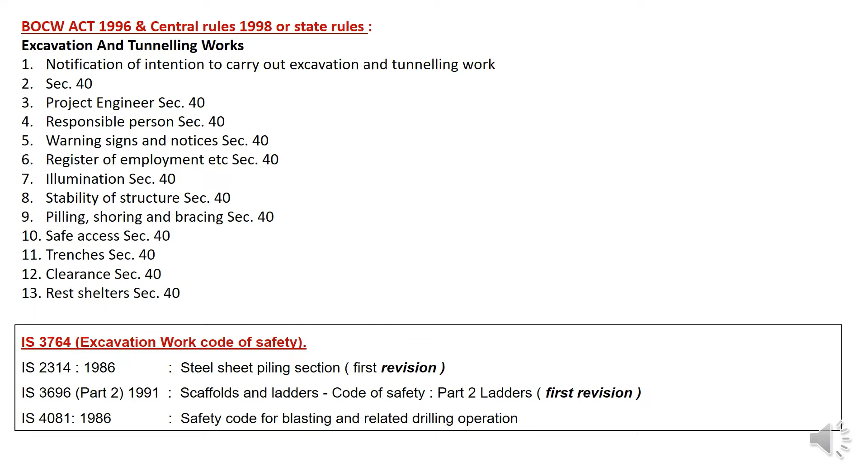And if we go to the IS code, then IS 3764, which is the excavation work code of safety, is applicable for excavation. In that, IS 2314 is there for steel sheet piling sections, IS 3696 is for scaffolding and ladders, and IS 4081 is the safety code for blasting and related drilling.

Before we start the excavation, we should take some initial approvals. If we are starting the excavation activity in a particular state, I'm talking about Haryana, then we need to take approval from the government authorities or the mining authorities, and the legal rule for that is the Haryana Minor Mineral Concession, Stocking, Transportation of Minerals and Prevention of Illegal Mining Rules 2012.

So what it says is where it is applicable. Overall, excavation of brick earth or ordinary clay up to a depth of 1.5 meters from the adjoining ground level. That is the basic idea. If we are going to excavate more than 1.5 meters, then we have to take permission from the mining authorities, and it has crisp details and a detailed description of the excavation requirements where we need to take the mining authorities' approval.

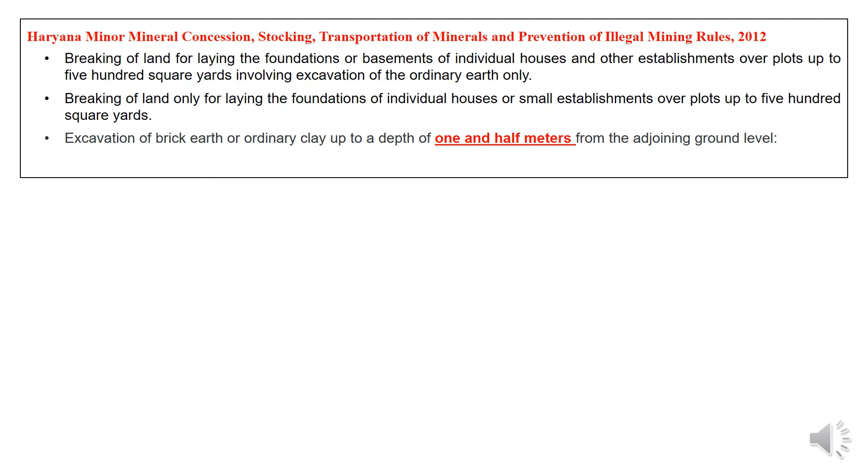That is, breaking of land for laying the foundation or basement of individual houses and other establishments or plots up to 500 square yards involving excavation of ordinary earth only, breaking of land only for laying the foundation of individual houses or small establishments or plots up to 500 square yards. And the last one is the 1.5 meters. So for that we need to take the mining approval.

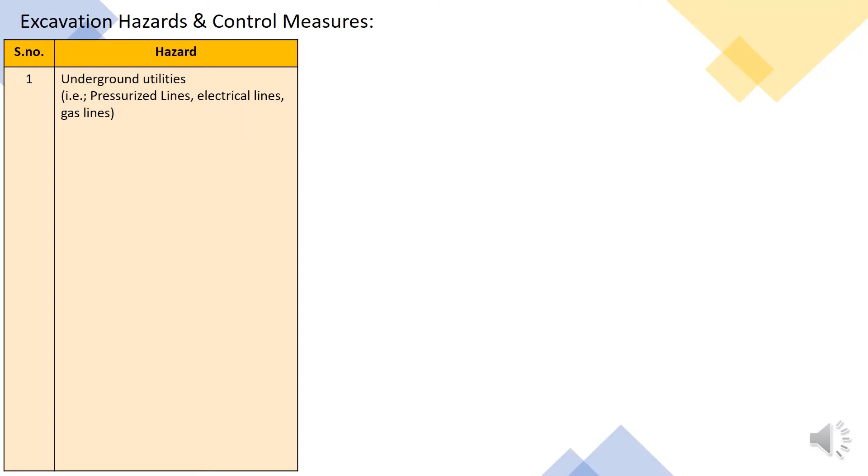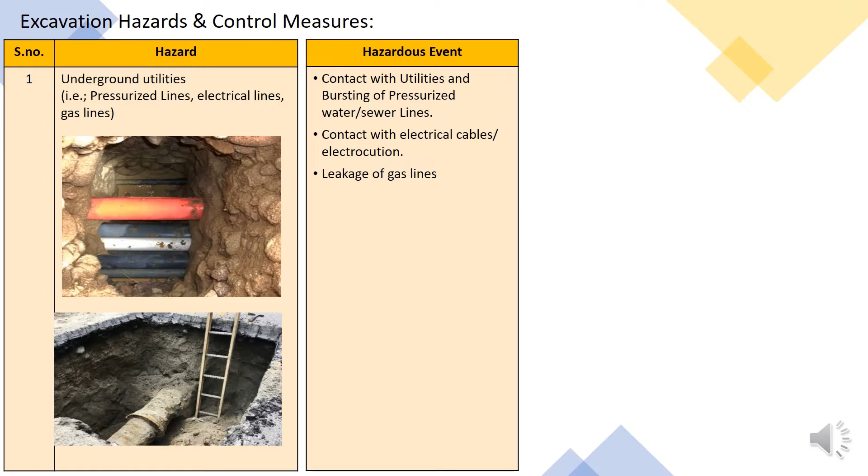If I talk about the hazardous event, if someone comes into that hazard or gets exposed to that hazard, then the hazardous event will occur. And the hazardous event may be contact with utilities and bursting of the pressurized water or sewer lines, and contact with electricity cables and electrocution. And the third one may be leakage of gas lines.

And the control measures to mitigate these hazards are: the first one is the excavation clearance work permit system to be followed. Second is use of the cable detector or utilities detector. Third one is trial pits shall be made before the excavation. Persons provided with mandatory PPEs. Refer the IS code 3764, which applies for excavation more than 1.5 meter depth only.

And the other one is IS 4081, which is the safety code for blasting and related drilling works, which we need to refer if we are going for that. Drilling and blasting operations should follow the safety precautions as laid down in IS 4081. So that depends if we are going to do blasting, drilling or related works in the excavation.

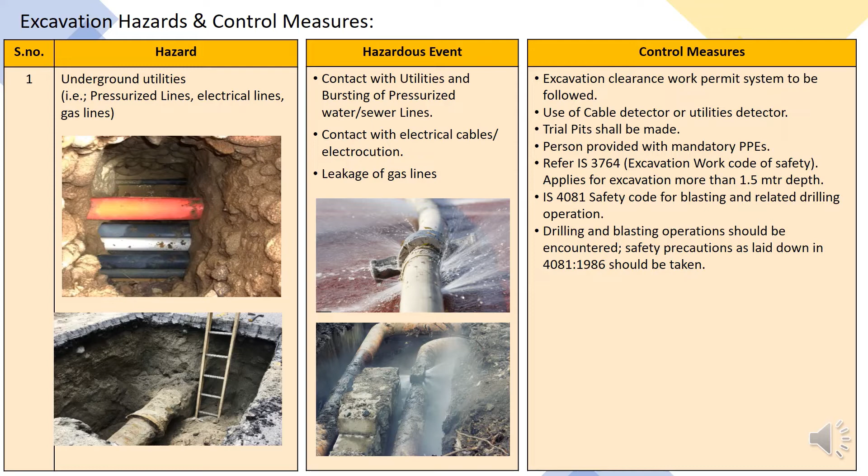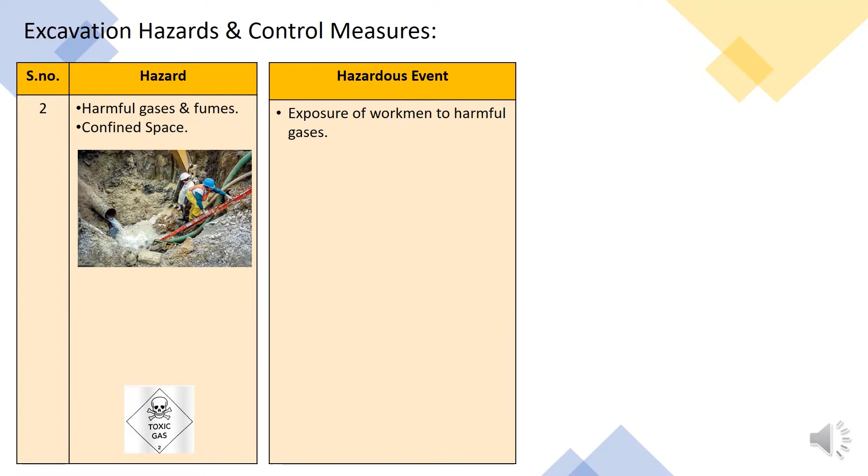Next, let's see the hazards and the control measures we have put here. The next excavation hazard is harmful gases and fumes in the confined space. What would be the hazardous event for that? The exposure of workmen to harmful gases. The control measures: where gases and fumes are likely to be present in a trench or tests show their presence therein.

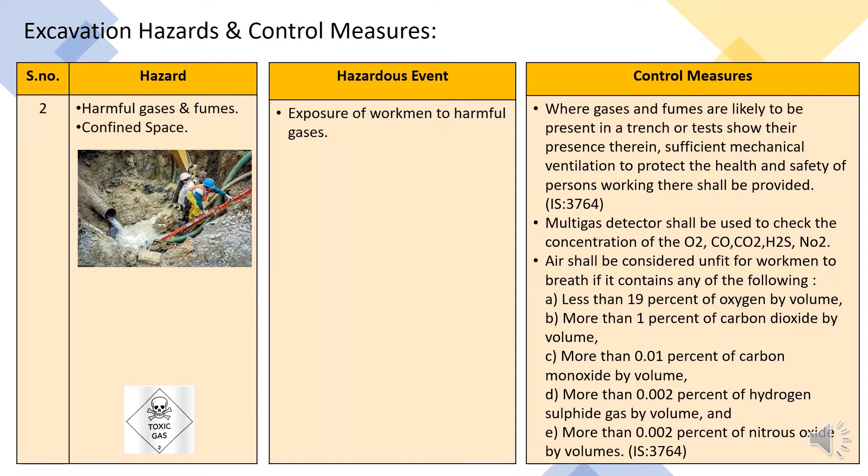Sufficient mechanical ventilation to protect the health and safety of the persons working there shall be provided. A multi-gas detector shall be used to check the concentration of oxygen, carbon monoxide, CO2, H2S or nitrogen oxide. Air shall be considered unfit for the workmen to breathe if it contains any of the following.

Less than 19% oxygen by volume, more than 1% carbon dioxide by volume, more than 0.01% carbon monoxide by volume, more than 0.002% hydrogen sulfide by volume, more than 0.002% nitrous oxide by volume.

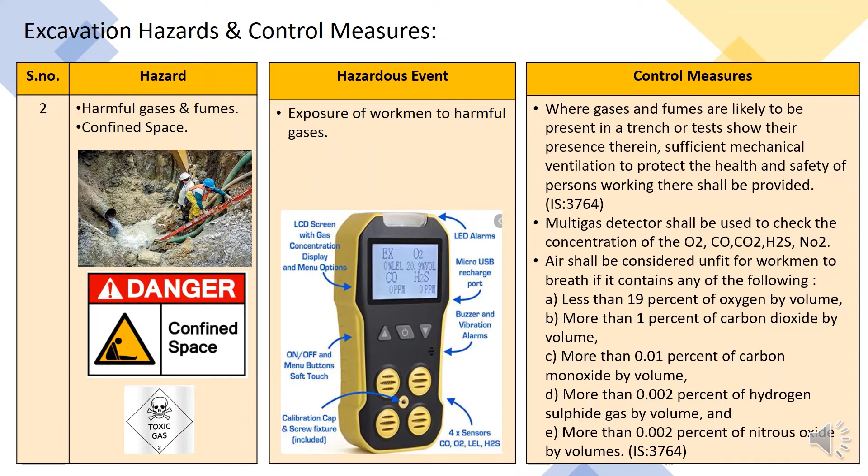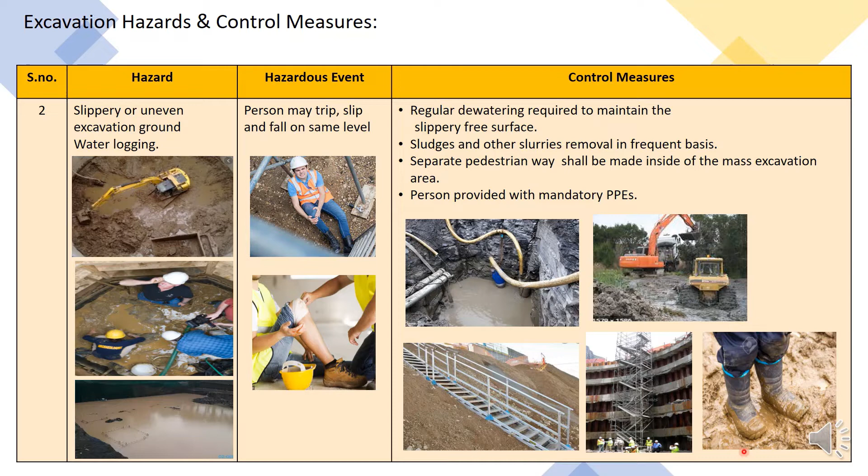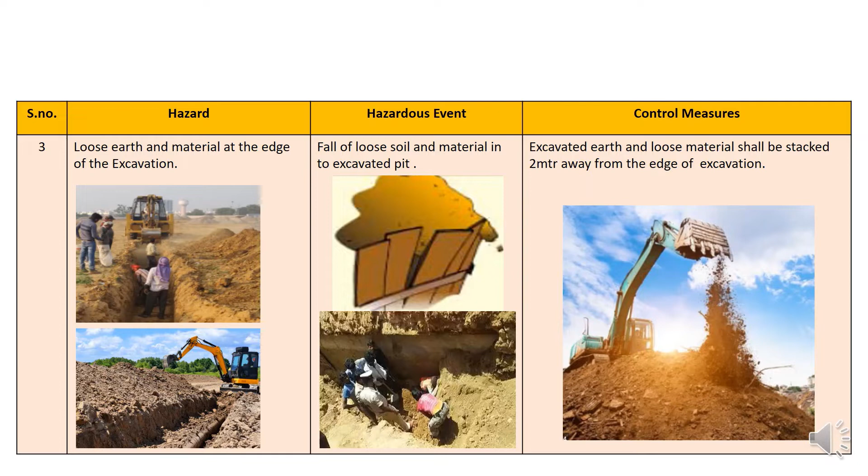And here comes the third specific hazard, that is loose earth and material at the edge of the excavation. Here you can see the pictures. What could be the hazardous event? The fall of loose soil and material into the excavation pit. The control measure for that is excavated earth and loose material shall be stacked 2 meters away from the edge of the excavation.

The next excavation hazard is a vertical cut or improper slope of the excavated soil wall. You can see the image: if a vertical cut happens and an improper slope is given, what could be the hazardous event? Collapse of the soil, definitely. If there is a poor slope or vertical cut, the soil is going to collapse. Collapse of the adjacent structure: if a nearby structure is associated with that excavation area and the soil collapses, that adjacent structure may be affected.

So you can see in these images the adjacent structure shown, and if that gets collapsed, the adjacent structure also might be affected. The control measures to avoid such hazards: adequate slope, benching of the excavation wall to be maintained as per the type of soil. We have special types of soils like A, B, C. So according to the soil type, we need to provide the benching and sloping for the excavated slopes.

Approval from the structural consultant is required for the excavation. The third one is shoring, sheet piling etc. to be done as per the structural consultant. Approval from the Ministry of Coal and Mines under the Haryana mining rules, wherein up to 500 square yards or 1.5 meters, in either case, no approval is required. So if you are going to have excavation more than 1.5 meters, we need to take approval from the related state government authorities.

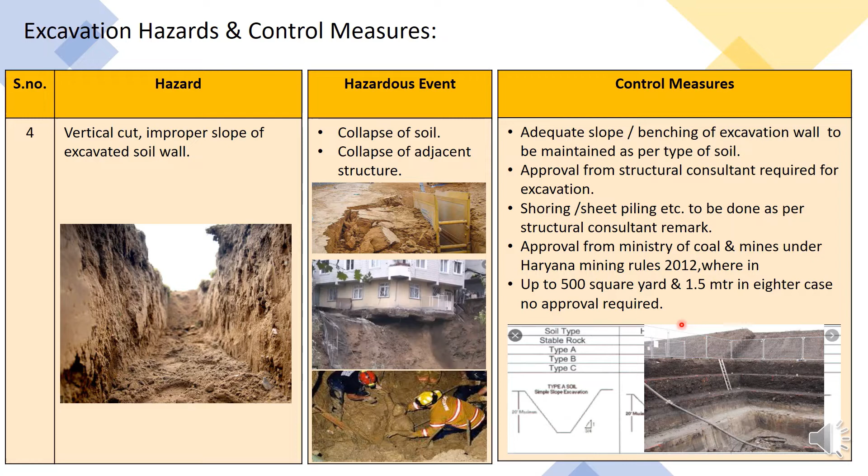Next hazard is soil caving. So if the excavation wall is not excavated properly, and we have not understood what kind of soil it is, then definitely the chances of soil caving are huge. So what could happen with that? Collapse of the soil, definitely. You can see the image with that.

The control measures to avoid this particular hazard are adequate benching and slope we need to maintain. And if required, then we need to provide the shoring as per the instructions of the structural consultant. This is the image.

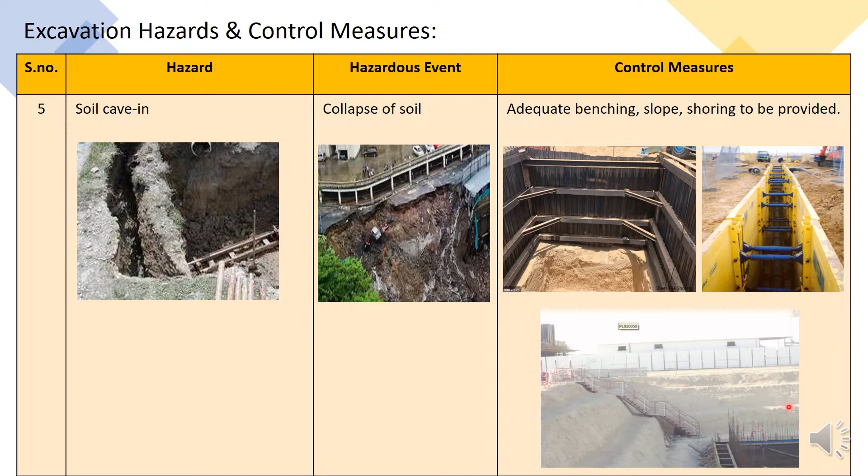What is next is vehicle movement. So that is the next kind of hazard, vehicle movement. So definitely in construction or excavation we have mobilized vehicles, and vehicles keep on moving here and there during the excavation. So what could be the hazardous event with that? Hit by vehicle, collapse of vehicle, or fall in the excavation pit. So these are the images of what may happen.

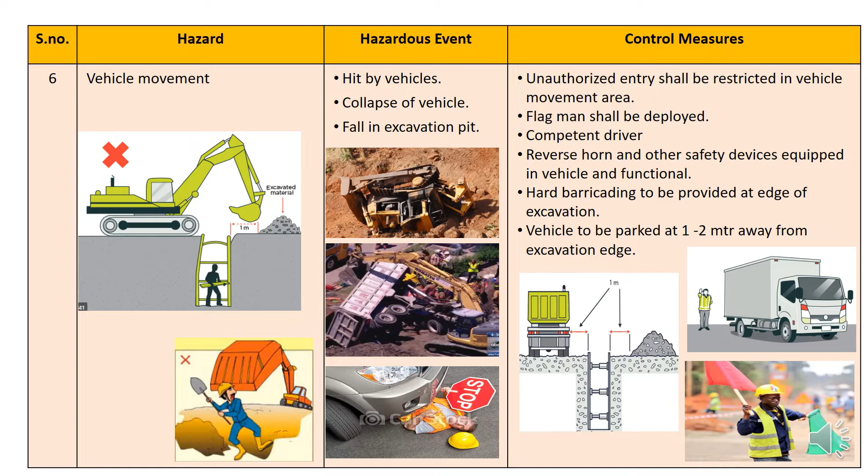And what could be the control measures for that? Unauthorized entry shall be restricted in the vehicle movement area. A flagman shall be provided, a competent driver shall be provided, reverse horn and other safety devices equipped in the vehicle and functional. Hard barricading to be provided at the edge of the excavation. Vehicles to be parked 1 or 2 meters away from the excavation. So these are the measures we can refer to and implement.

The next hazard is dust. Of course, when we are doing the excavation, dust is the major hazard we are going to be exposed to, right? And the hazardous event with that is inhalation of the dust, and we could get health effects or ill health. And the control measures to avoid such a hazard are regular water sprinkling to control dust exposure, and provision of dust masks to the workmen.

And the next hazard is open excavated edges. If we leave the excavated edges without any protection, then definitely somebody may fall in that excavation. So here are the images. The hazardous event is fall of the vehicle, of course, fall of the person and the material. If there are open excavated edges, then they may fall.

So what we need to do to avoid such a hazard is hard barricading shall be provided for the excavation, with top rail, mid rail and toe board. Cautionary hazard warning signs are to be displayed.

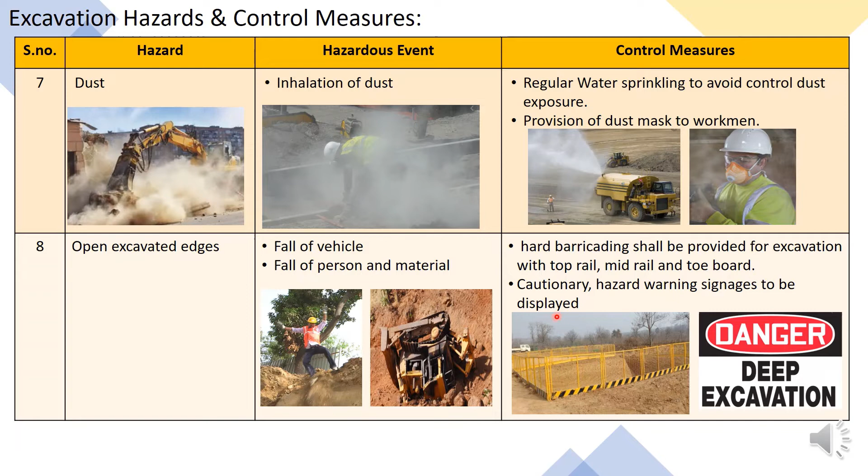Next is improper access for the men and the equipment. If the access is not given properly, then what could happen is fall of the person, or toppling of the excavator or the dumper. The control measures to avoid such a hazard: adequate ladders, steps or staircases shall be provided for adequate access. Next, a ramp or slope shall be maintained for safe movement of the excavator.

The third one is the excavation shall have at least one ladder per 15 meters of length or fraction thereof in case of hazardous work, and per 30 meters of length or fraction thereof in case of relatively less hazardous work. So what it says is, if it's not hazardous, then we can put ladders at 30 meters, and if it is hazardous, then we need to put the ladders at every 15 meters of length.

And what is next is ladders shall be constructed, used, maintained and inspected in accordance with the requirements laid down in IS 3696. So at least one ladder per 15 meters of length or fraction thereof in case of hazardous work, and 30 meters of length or fraction thereof in case of relatively less hazardous work.

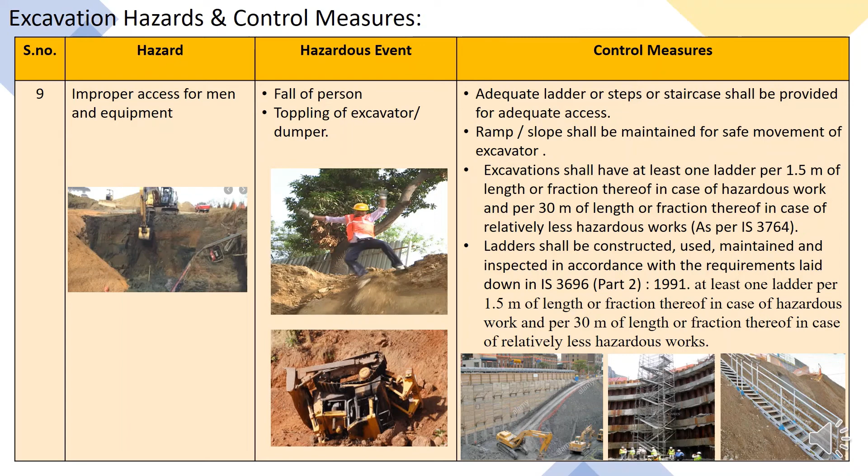So if we talk about the next hazard, that one is vehicle movement on the excavation edges. What could be the hazardous events for that? That is collapse of soil due to vibration and load, and fall of vehicle inside the pit. You can see the image here. So what we need to have in control measures is vehicles shall be kept away from the excavation edges to prevent soil vibration or fall of vehicle. And the next one is hard barricading shall be provided at least 1.5 meters away from the excavated edges.

What is next is unguarded vehicle moving parts. So if the vehicle is not provided with guards, like the moving parts of the vehicle without guards, then what could happen is contact with vehicle moving parts. So anybody can come in exposure to the moving parts of the vehicle. All moving parts of the vehicle shall be guarded. Vehicles shall be allowed after inspection only.

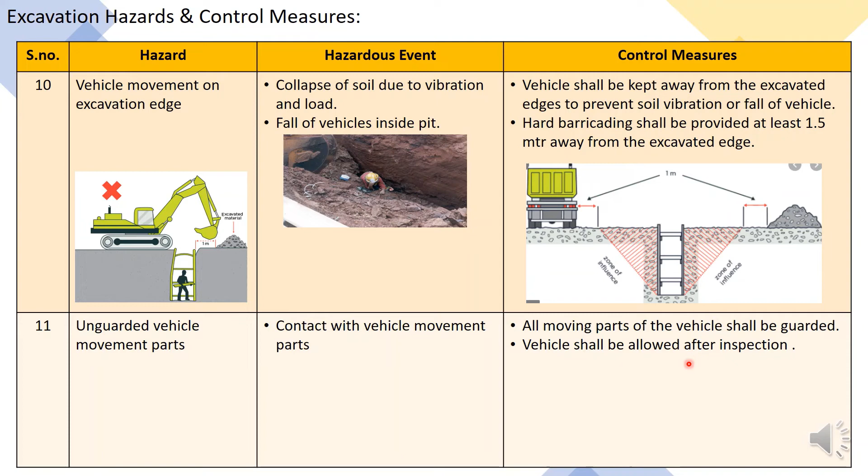So let's talk about the next hazard, which is unauthorized operation of the vehicle. So if authorized persons are not operating the vehicle, what could happen is being hit by the vehicle, and the control measure would be an authorized competent operator with a driving license should be provided, and speed limit signs to be displayed.

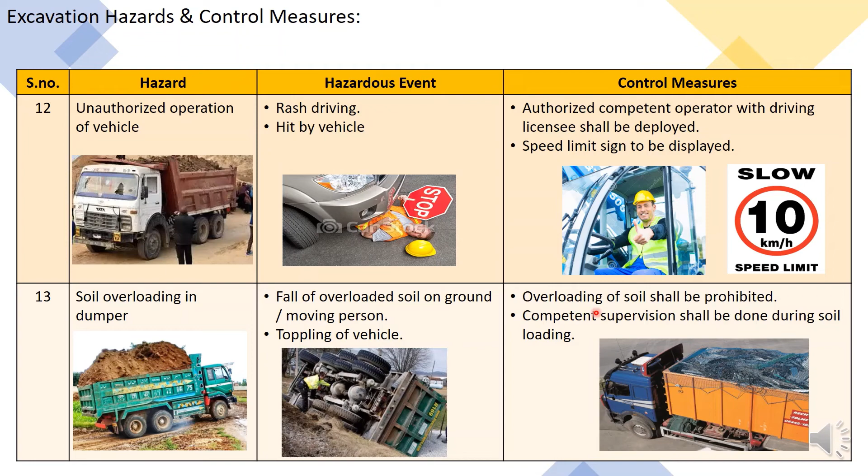So you can see next is soil overloading in the dumper. Definitely we can see in excavation, at most places the dumpers are being overloaded, and what could happen with that is fall of overloaded soil on the ground or on a moving person, or toppling of the vehicle. So what are the control measures you need to take? Overloading of the soil shall be prohibited. Competent supervision shall be done during soil loading.

Let's talk about the next, which is poor illumination. So due to poor illumination, what may happen is fall in excavation. And what we need to have in control measures is adequate area illumination shall be maintained. Adequate reflective PPEs like jackets shall be provided for visibility. Barricade radium lights you need to put.

And the next hazard is unauthorized visitor movement. So if unauthorized visitor movement is found in the construction, then definitely they are unaware of the hazards. So what may happen is they may fall into the excavation pit or be hit by vehicles. So what we need to have in the control measures are gate entry controls by security, to be taken very strictly, and site fencing of 5 meter height, so nobody can enter the site without permission.

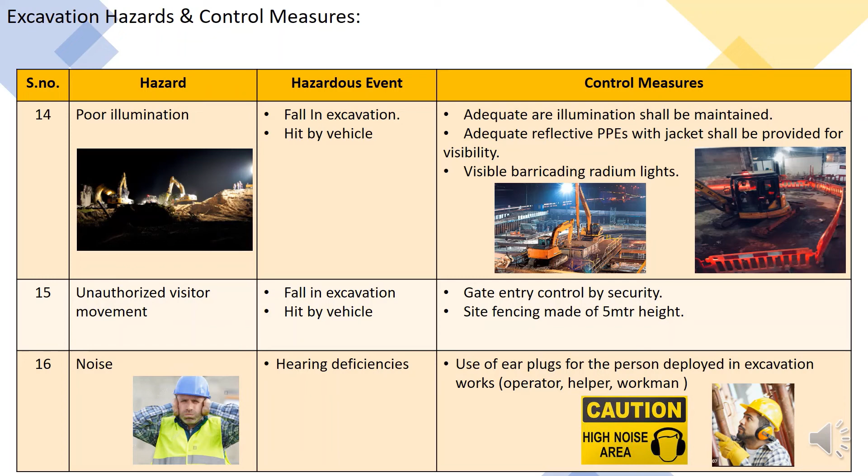So noise is the next hazard in excavation. With that, the hazardous event that may happen is hearing deficiencies, right? And control measures: use of earplugs for the persons deployed in excavation, the workers, operator and helper who are being deployed.

Let's talk about the next hazard, that one is the monsoon. Excavation is kept open for many days. The waterlogging chances are huge. The hazardous event will be drowning of the workmen, insects and creatures in the water, slippery surfaces or fall in, contact with electrical parts, wires of dewatering motors. So what we have to have in the control measures are sufficient dewatering pumps readily available at all times at the site, and the movement of persons restricted until the water is drained out. Adequate access with all required PPEs and gum boots is required. All electrical connections are insulated properly and routed through RCCB.

We talk about the next hazard, which is related to the insects that may be present in the excavation due to waterlogging or due to climate conditions. So the hazardous event is insect bite, snake bite, etc. So the control measures should be repellents, drainage or spraying of breeding areas, burning or destruction of nests, use of smudge pots for protecting small areas, elimination of unsanitary conditions which propagate insects or vermin, and extermination of rodents by fumigation or inoculation.

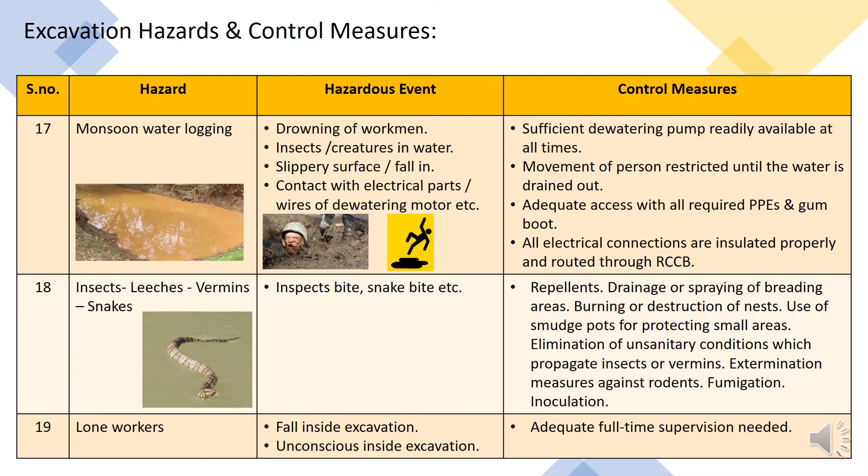And the next hazard could be lone workers. And the hazardous event will be a fall inside the excavation, or being unconscious inside the excavation. So in control measures, you need to have adequate full-time supervision at the